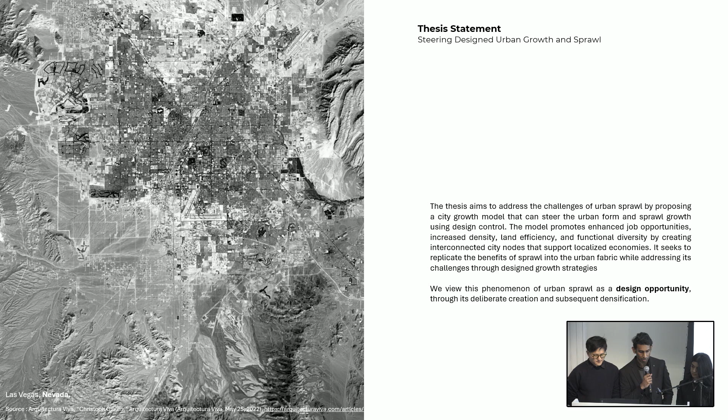Our definition of sprawl is a single function low land efficiency settlement. As newer and rapid forms of transportation became viable, people travel further away from the city center to find open residential settlements that are low density, developed at the expense of long journeys to and from work.

But sprawl presents an opportunity when it creates parcels of low land value, which lead to affordable living with quality open space outside the city at a negotiable distance from the place of work, where we are looking to exploit this opportunity to control and design the pattern of sprawl.

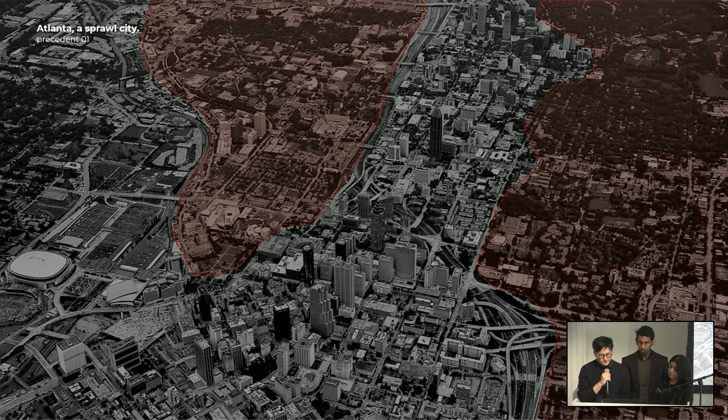We look at a few cities like Atlanta and Barcelona. In our precedents, we see areas of predominant character in concentration, mainly live, work, visit. For us, Atlanta represents a sparse density, heterogenic growth, and Barcelona represents a dense, homogeneous growth.

In Atlanta, by identifying the transport nodes in the city, we learned that the public transportation system is serving a small region which happens to be the higher density regions. Public infrastructure cannot efficiently function in areas of low density.

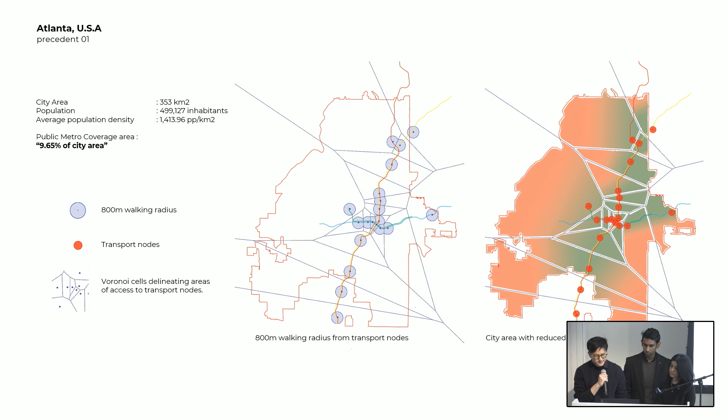Then we look at our next precedent, Barcelona. In Barcelona, we learned that the public infrastructure is easily accessible to a significant population owing to its dense population.

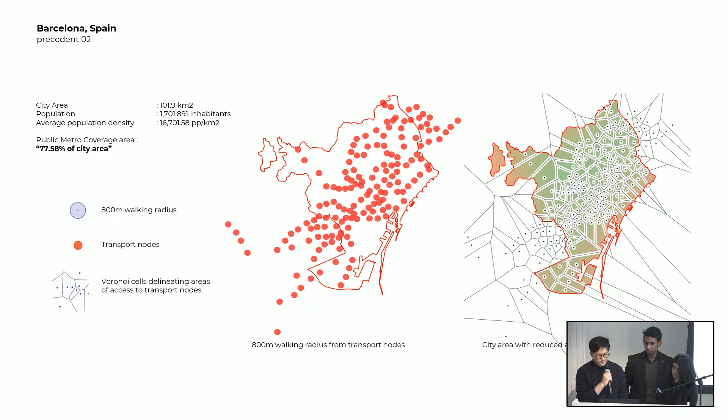While Barcelona's compact urban form successfully achieves higher density compared to Atlanta, it tends to lack differentiation in character that could define distinct city functions, such as living, working, or visiting. This leads to an isotropic urban landscape where districts appear homogeneous.

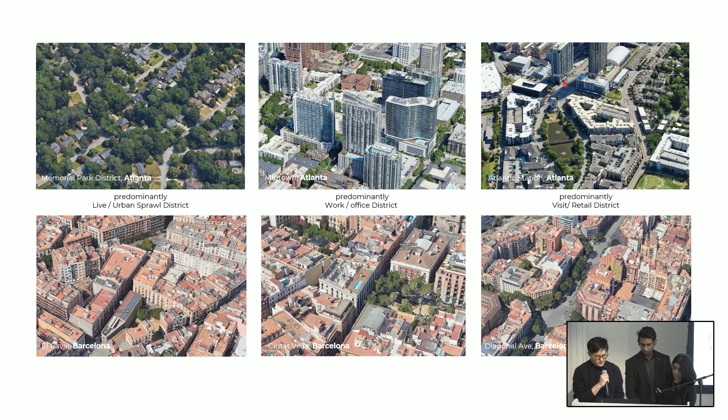The primary motivation is to develop an urban form that is both experiential and economically viable using automated urbanism and building systems. We look at literature precedents like Order Without Design on occupying and connecting to develop our urban systems, while Frei Otto's thinking by modeling has influenced our building systems.

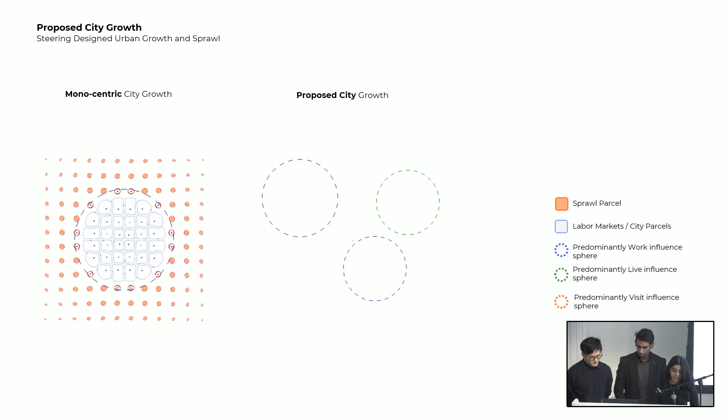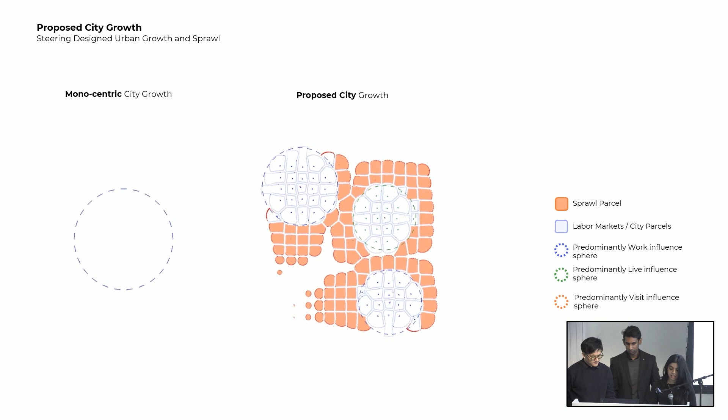Learning from Alain Bertaud's idea of looking at cities as labor markets, conventionally cities grow around labor markets, and as it grows, it transitions into urban sprawl around the city center. Our proposed growth informs the strategic location of district centers, which develop in proximity to one another.

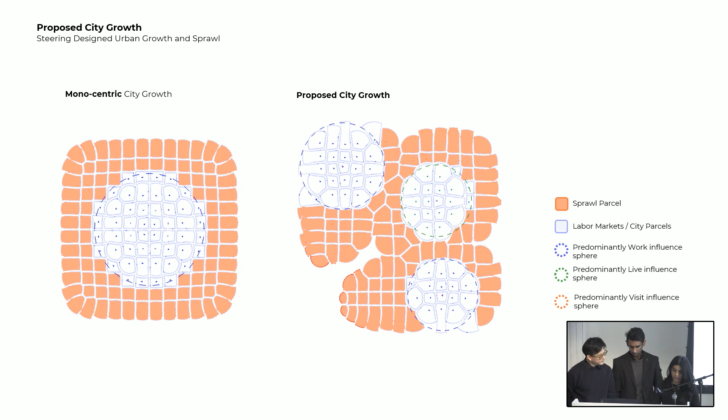We look at the sequence of expansion and compaction by varying the number of nodes and distance from city center. This generates city parcels of different sizes based on these expansions and their subsequent compactions. We evaluate these iterations based on parcel size and proximity to city center.

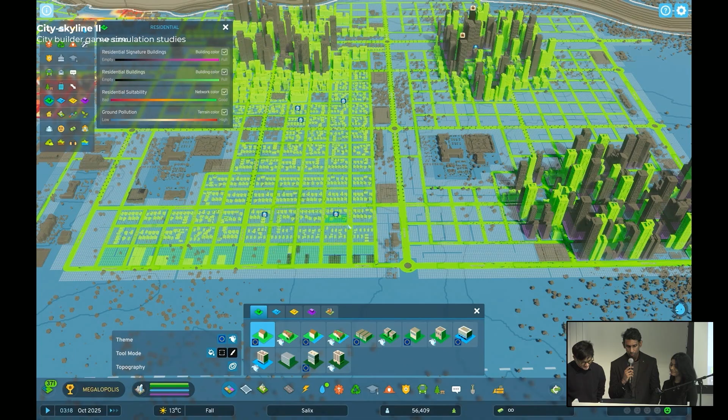Once we iterate through our sequence of growth and compaction, we use city builder games such as Cities: Skylines to simulate and evaluate our proposed city growth. This allows us to evaluate through economic constraints like land value, customer value, and workplace value.

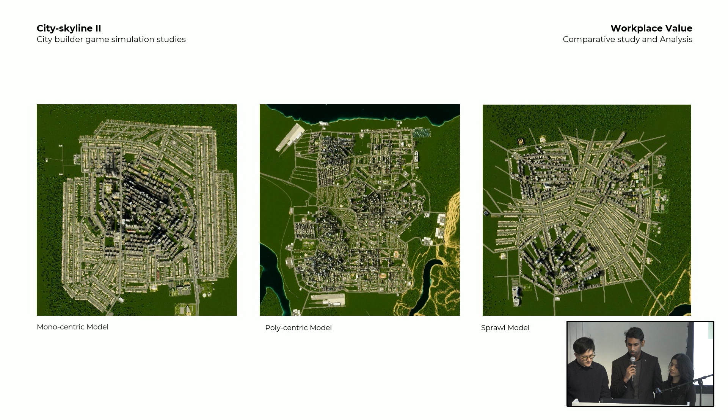We simulate our models of growth for a monocentric model and a polycentric model derived from our custom script. We evaluate this against a prototypical sprawl model. From this, we evaluate the distance to workplace, which informs potential job locations. We observe the distance between work clusters and people situated in the sprawl zone.

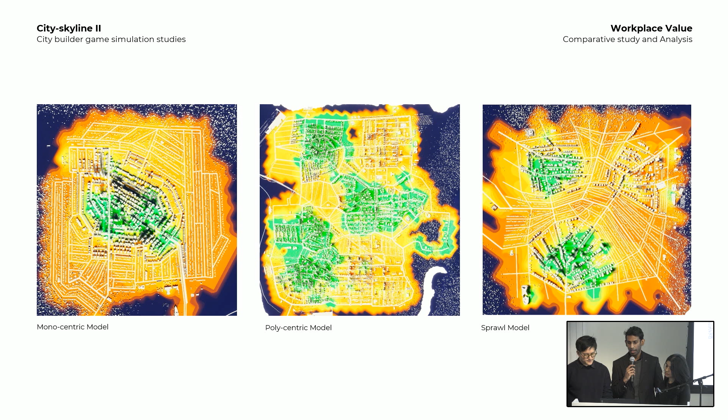The monocentric model shows an increased travel to work time as the city grows. The land value evaluation shows that monocentric models generate greater regions of low land value when compared to polycentric models of growth. City centers showed higher customer values, which implies high concentration of commercial activities. Higher concentration of commercial activities directly affects the economy of each model.

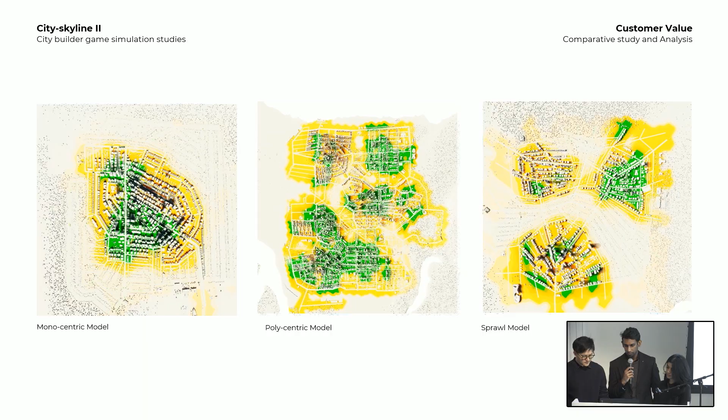Once we iterate through our sequence of growth and compaction, we learned that Cities: Skylines works on an economic model for function allocation, working on a feedback loop, where each plays against the next turn. However, it does not respond to phasing and densification once a city is created.

So our strategy is to look at these functions as districts and urban compaction as a means to achieve this controlled sprawl. We split our thesis into two parts: compaction of districts and densification of sprawl. We look to achieve this compaction through controlled densification of districts, their distribution, and the connectivity between them. This relates back to our building systems and fabrication strategies.

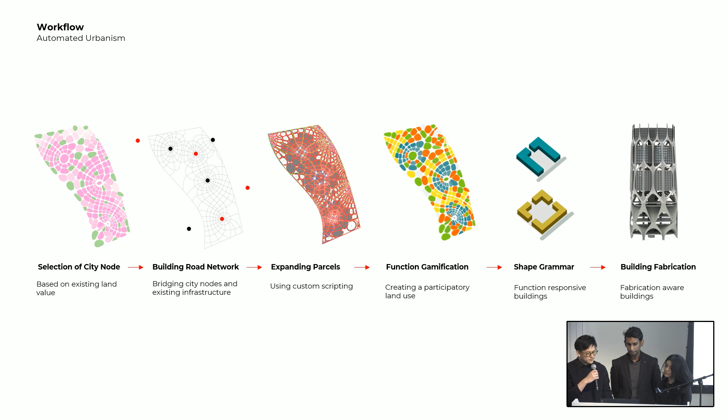And the urban architectural intelligence comes from the logic of distributions of district centers. To summarize our workflow for our automated urbanisms, we pick city nodes based on existing land value. We build the road network connecting existing infrastructure, which then guides our parcel generation and expansions.

We use participatory land use allocation to guide our city growth phasing. Each function responds to specific shape grammar rule sets. Once the urban fabric is generated, it is then translated into tectonic interpretation with our form-finding explorations.

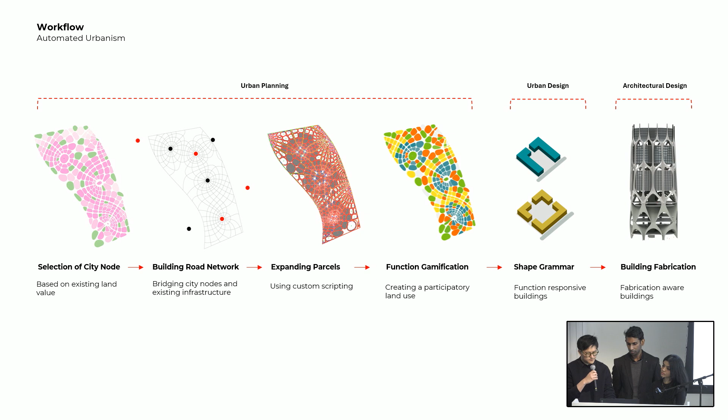To implement our theory of compaction, we choose to implement it between Walthamstow, Leytonstone, and Stratford. The existing functions in the site exhibit a combination of live and work zones. The site is contextually rich in natural features which affects the function organization. We are also looking at major access points in our area to study existing transit points as our initial input.

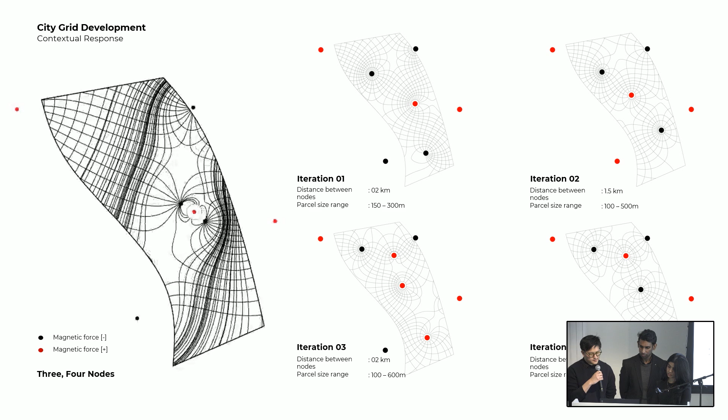So the vector fields are informed by the external site influences. This helps us to merge our internal input conditions with our contextual response. And here we tested with varying the number of city nodes input at different locations, and we evaluated them on the basis of size of parcel generated. The smaller parcels are generated in the city, and as the distance increases, bigger parcels are generated in the sprawl.

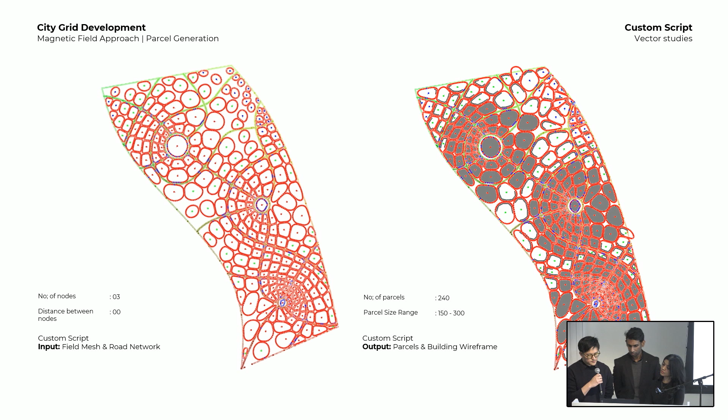The existing site context informs the generation of road network. This information overlaid with our vector field is our input condition to generate parcels and their building wireframes. With our generated parcels with vector information, we use participatory zoning and land use allocation to establish the city's growth phase and function distribution. We play the game at global level and local level.

The global play is a top-down approach that essentially dictates the phasing of the city's growth, from sprawl to densified sprawl and eventually to city by assigning city location. The local player is a participatory bottom-up approach that dictates the function distribution in the city.

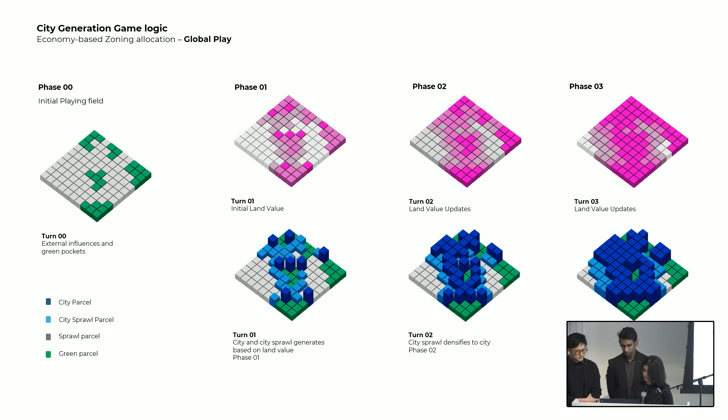In the initial field, we generate a field of sprawl which responds to the road network. This then triggers the generation of open spaces which are influenced by the site's external natural features. The contextual response informs the land value, which in turn influences the city node allocation.

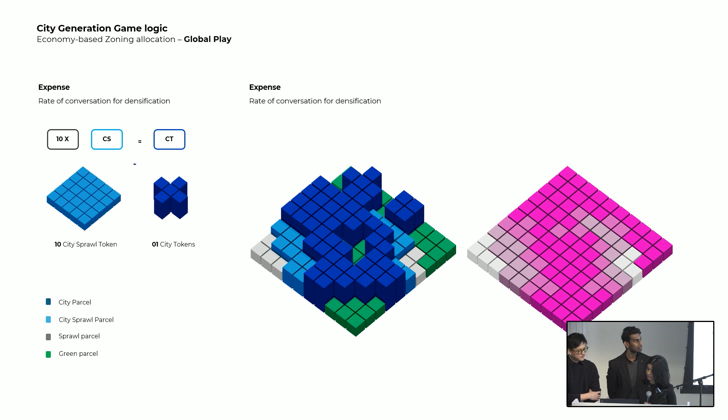The player spends city sprawl tokens to generate city which in turn triggers the next phase of city sprawl growth. This again updates the land value, which triggers the next phase of growth. So the growth logic for our city is informed by this phasing feedback loop. We look at the game as a method of generating an economic and phasing model for the city growth and densification in sprawl.

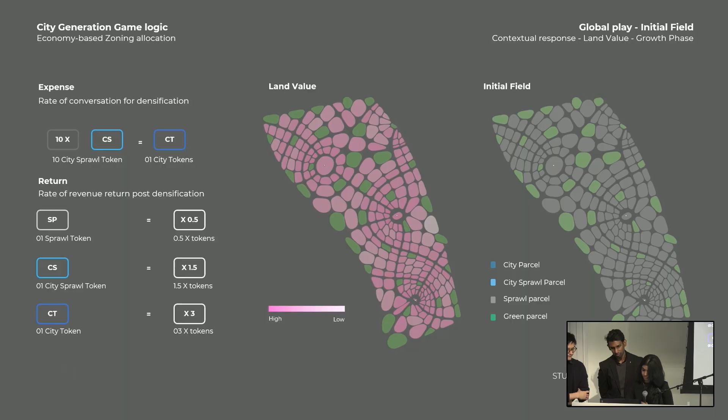The game ends when the city has achieved its mean average target revenue. We played the game to iterate through different growth strategies. We evaluated the growth sequence based on revenue spent and time taken for each growth phase. We see that the 3 nodes growing simultaneously densified with more revenue generated and comparatively less time to achieve the target revenue.

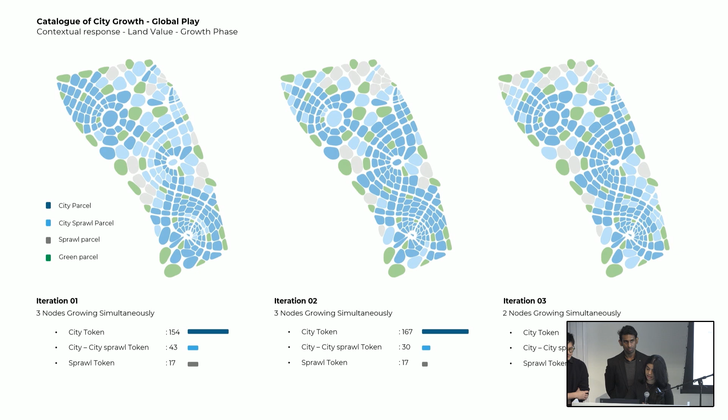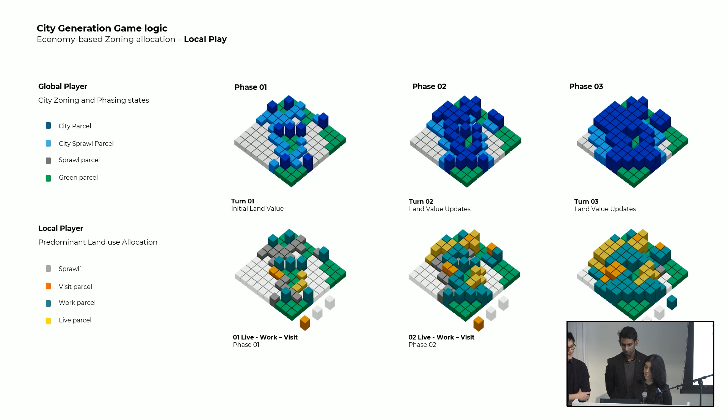From the global play, we get each growth phase, and the local player takes turn by turn to allocate functions for each parcel. The local players are live, work, and visit. The players pick the parcels based on distance to the city center, and the rate of revenue return is calculated based on the scoring matrix. The scoring matrix follows the rules for proximity for each function.

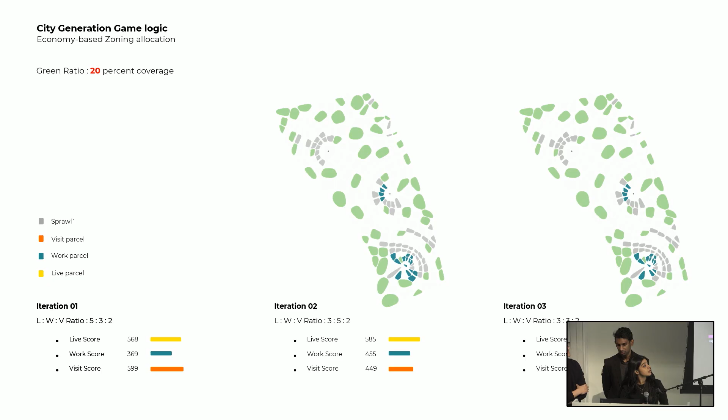It is more economically viable for the live player to build away from the city while the work player tries to build closer to the city center. This is a reflection of our notion of labor markets and labor supply and affordable living closer to the city.

Once live and work players populate the city sprawl, visit assigns itself closer to the open spaces. The visit populates itself in an 800-meter walking radius from the open space. The players play till they populate all the city sprawl. This triggers the phasing feedback loop.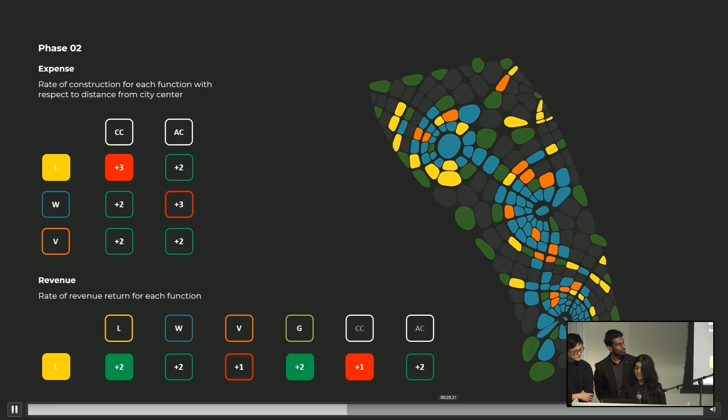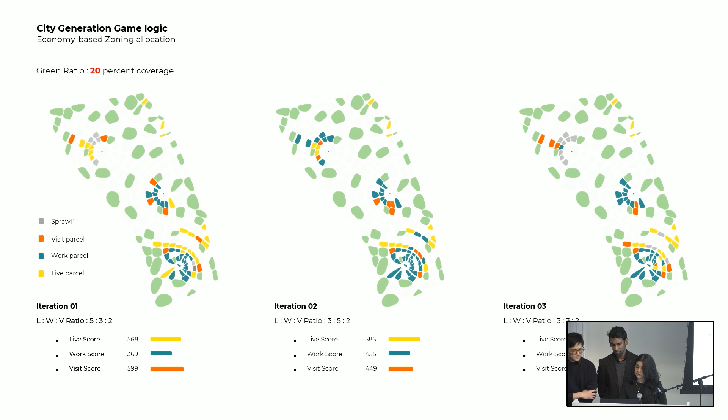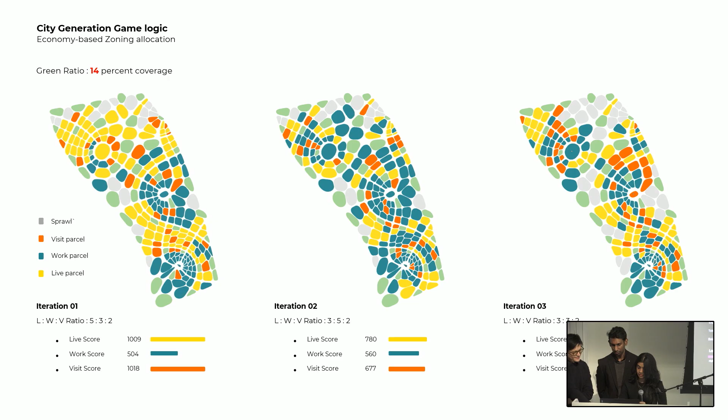We iterate through the game based on different ratios of live, work, visit to evaluate different function distribution. We evaluate them based on function scores and distribution ratio. We also tried varying the percentage of green coverage to achieve higher scores for each function. This is the summary of our game at each phase of growth and its subsequent function allocation. We see how each growth phase triggers the land value and subsequent densification of sprawl.

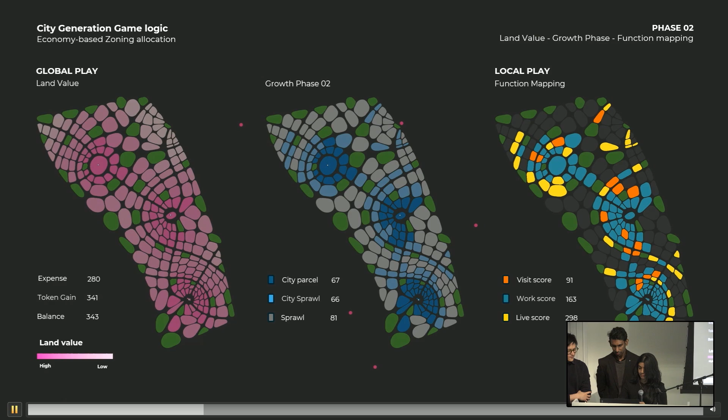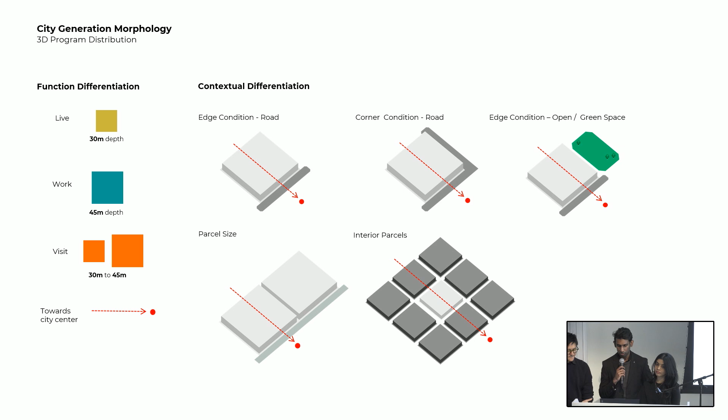We then move on to the local rules for primitive generation. The shape grammar responds to function of the building and its context by varying depth and orientation towards city center. We set the primitives for our building to respond to phase construction. Depending on the function allocation in every phase, the primitive generates podiums of said functions.

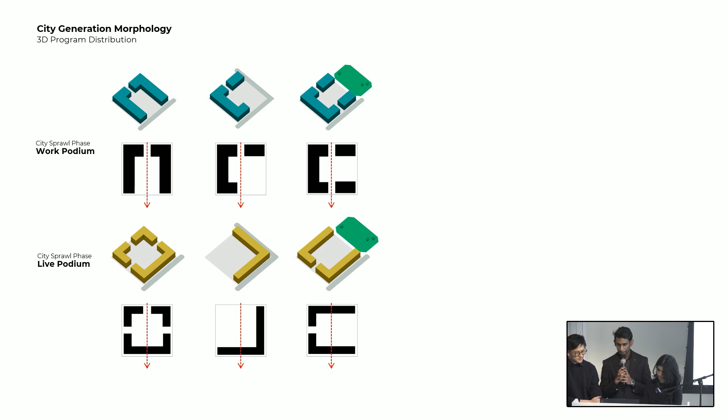These podiums respond to their immediate context based on their function differently in the next phases. Live functions cluster closer to the road to generate semi-private open spaces between them, whereas work functions move away from the road to generate public plazas. When the city sprawl densifies, the podiums add towers on top to respond to their densification. The podiums in visit behave differently based on their proximity function.

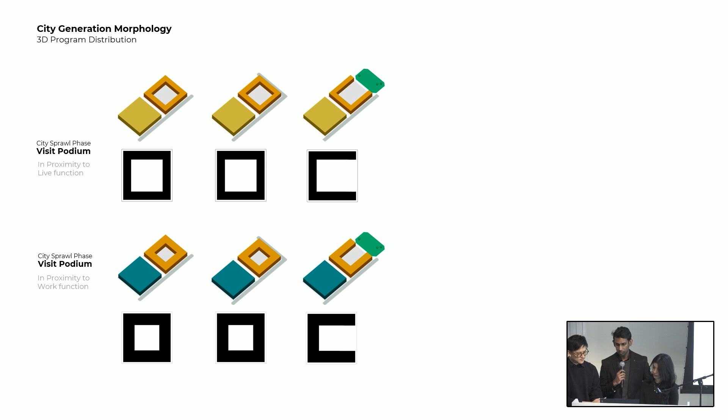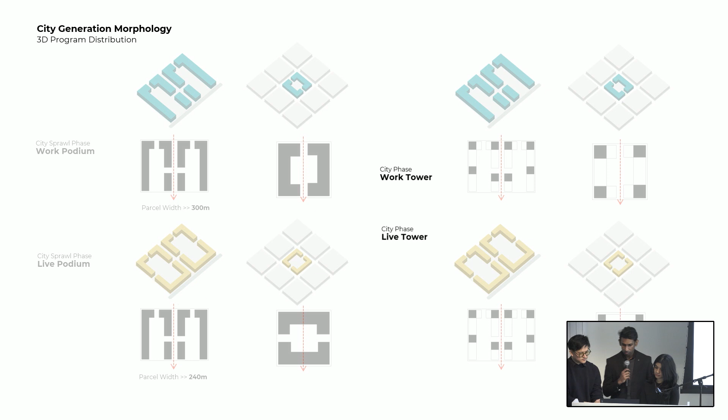If it's closer to a work function, the tower generates away from the road. If it's closer to a live function, the tower generates next to the road. When the parcel sizes grow, the massing splits, orienting in the direction of city center.

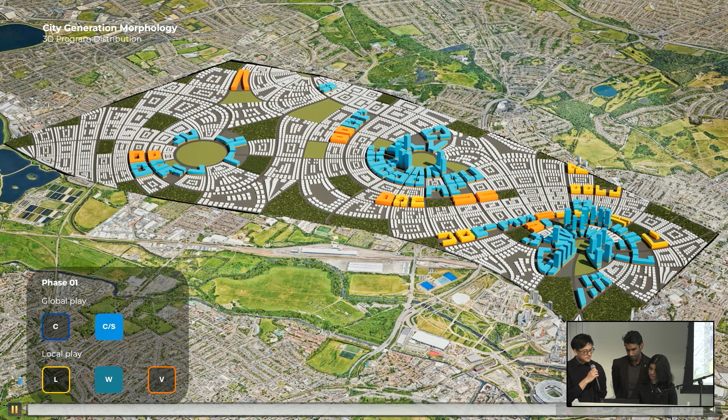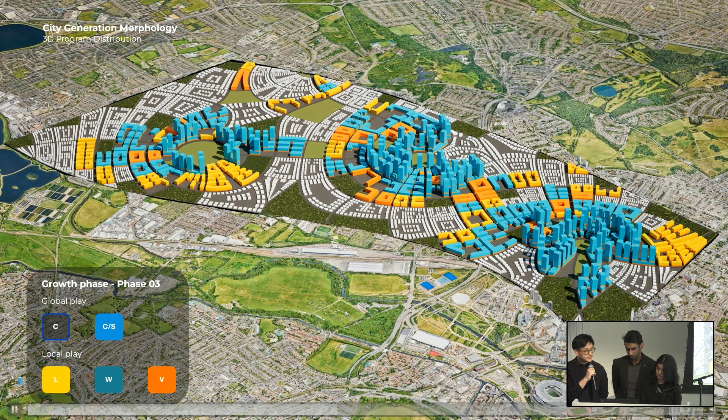Then function adds podium at every city sprawl phase, and when they densify to become city center, towers are generated. And we use the participatory allocation of city phasing and function mapping to inform the height at each phase of growth.

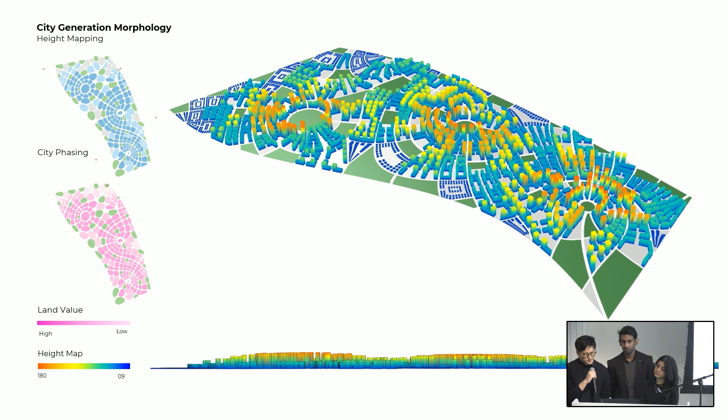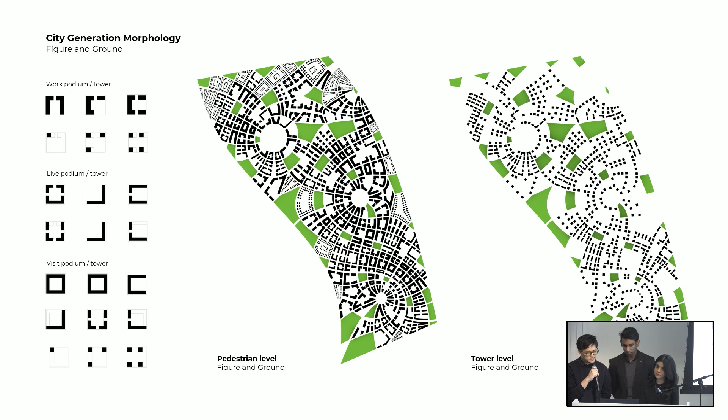The max height is determined by the relationship between parcel area to land value. This gives us the max height the parcel can grow to in that phase. And then we use figure and ground mapping to evaluate the gradient density and porosity of this urban fabric.

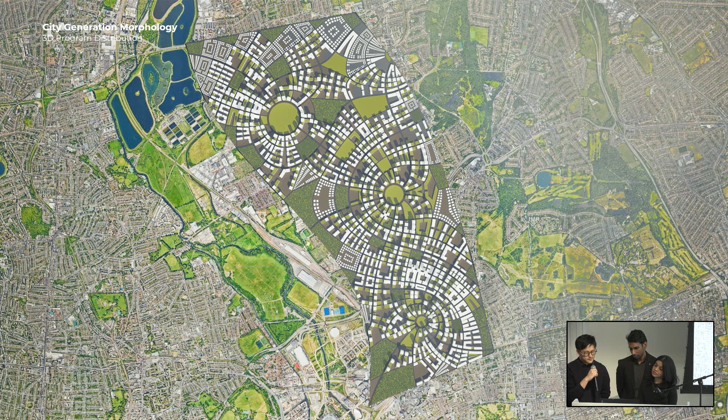And this is our urban fabric at its final state of densification and growth, showing the hierarchy of open spaces like parks, roof gardens, and plazas, and a height gradient from sprawl to city through city sprawl.

To summarize, growth logic for our city is informed by a phasing feedback loop. The contextual response triggers the initial state of growth followed by subsequent densification. Our thesis aims to densify the sprawl through improving the connectivity across the city and sprawl.

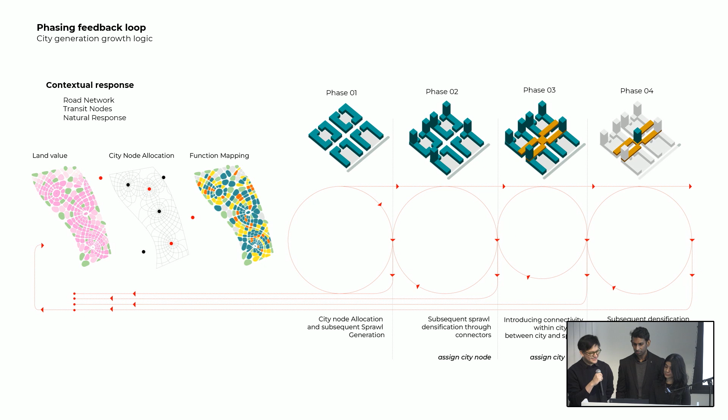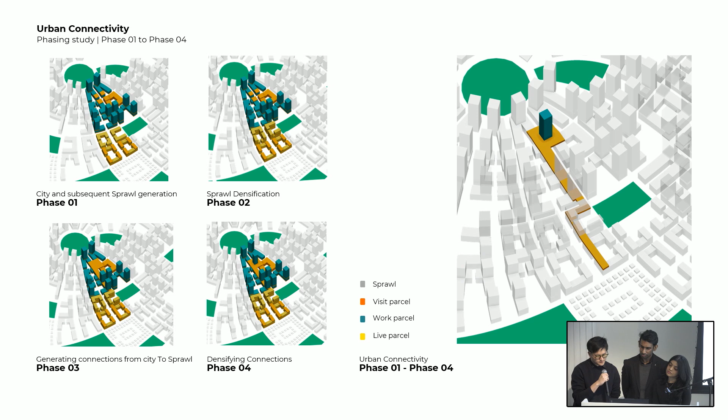And at the district level, we establish a primary connectivity at different growth phases from city to sprawl through visit functions. When three live parcels cluster together, they form a podium which connects to the city through a visit function.

So for our thesis, connectivity plays an important role because it helps us achieve this compaction through densification of districts, its distribution, and the connectivity between them. So as we discussed, connectivity plays an important role for our thesis, so we looked at different levels of connection.

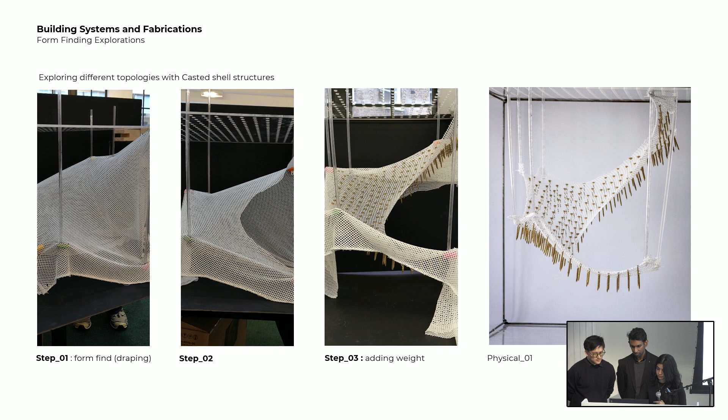As a starting point, we used form finding methods to understand compressive surfaces. This is our initial attempt at casting and inverting our form found to create a compressive shell structure. We try to digitally approximate our form found structure to understand different topologies and control parameters.

We found that rather than a point interface, a hard edge interface was more controlled. The hard edge interface can be concave and convex. This also allows us to iterate with combinations of these. We also found that intermediate touchdown points give more span control.

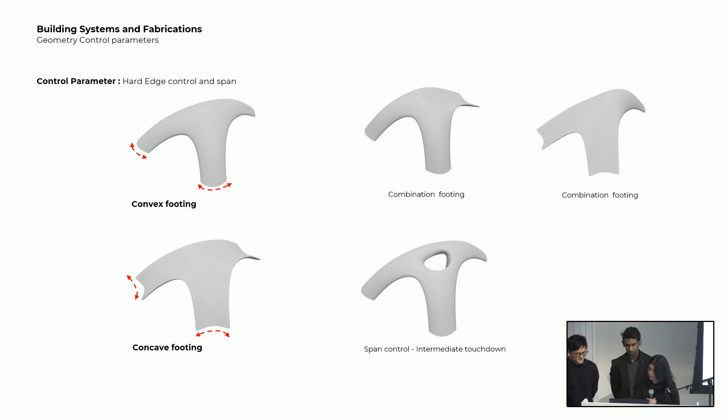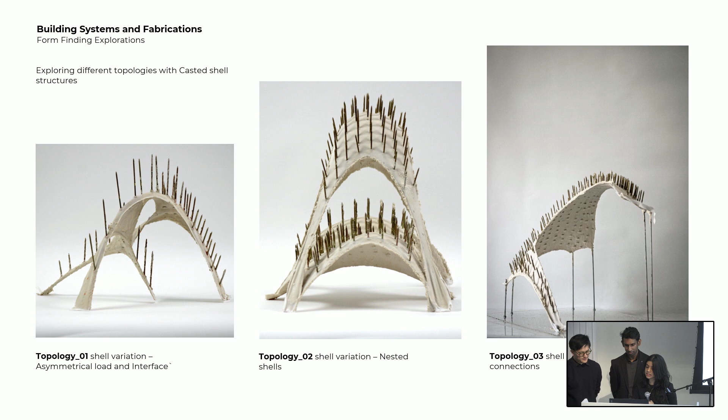We attempted to explore multi-level connectivity, same level connectivity, nested shells, and different load and asymmetrical points of interface with compression-only form.

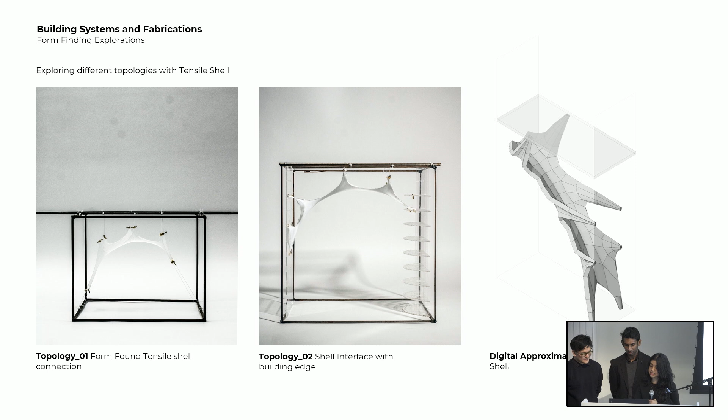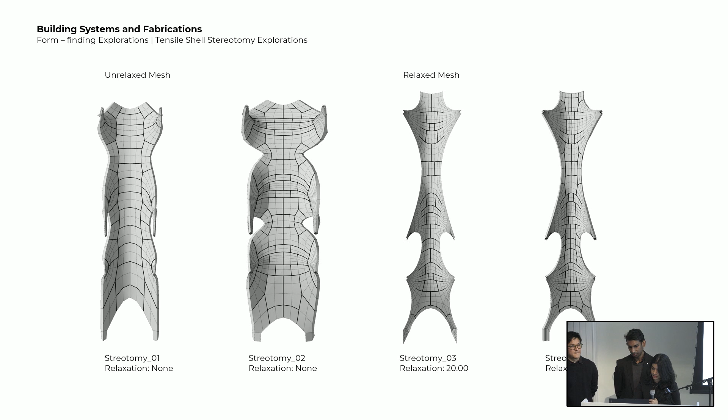We started studying multi-level connectivity with tensile shell structures. We physically modeled to find this connection between buildings. We studied how they would interface with different building edge conditions. This is our initial form found approximation and its stereotomy.

We tried to interpret connectivity as a skeleton structure. We explored varying curve network topologies by hanging chains. We tried to approximate a hanging model to stick networks, which still carries forward information about the hanging chain.

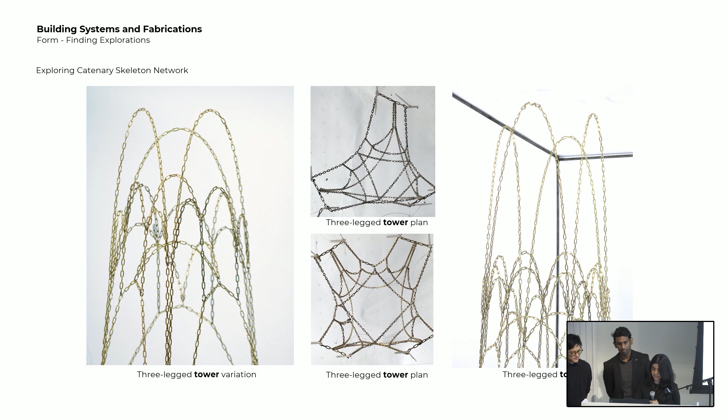We explored catenary topology networks at building level. We introduce control by exploring various levels of subdivision, points of touchdown, and adding connections between them. We studied the node geometry in our stick model and tried to translate this joinery as conic intersections. This allowed us to approximate our stick model to developable surfaces.

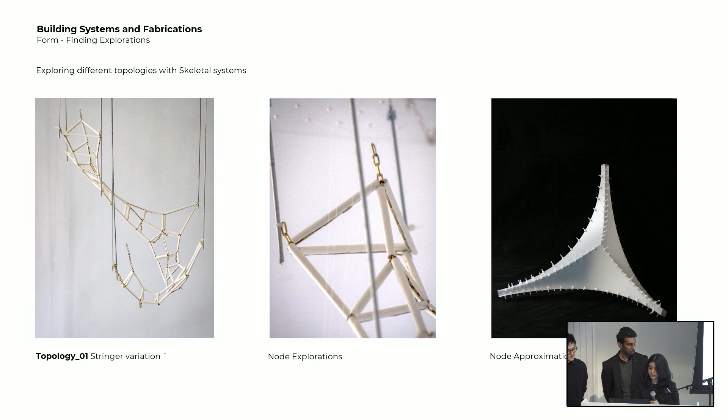We tried to digitally develop this, and with our first study, we understood that as the node angle approaches 180, it tends towards parallel, and as the node angle tends towards 0, the outer rail will kink, and at a point, the inner rail will deviate from the outer curve.

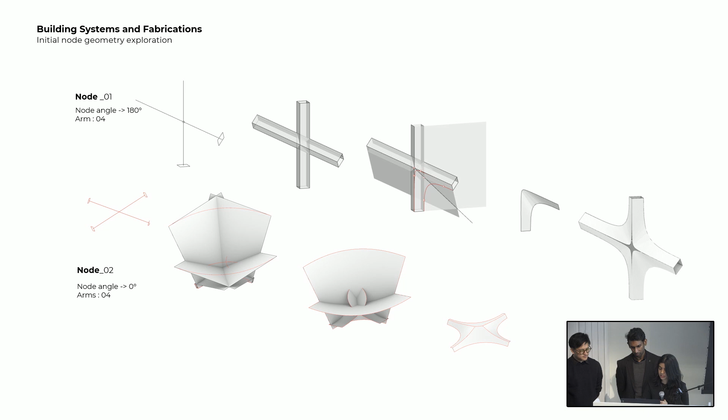This is our formwork for our concrete casting, and this is us trying to develop our formwork. We use developable surfaces to create formwork and generate offsets to manage weights. This is our cast concrete node iteration.

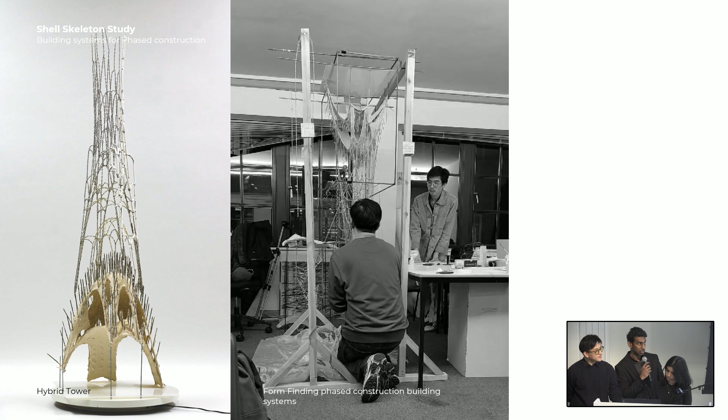Our thesis requires our fabrication to enable us to look at phased construction as well. So we started looking to merge our two systems as a phased fabrication. We explored physically how these systems could merge with one another. And this was our first iteration with this phased construction system.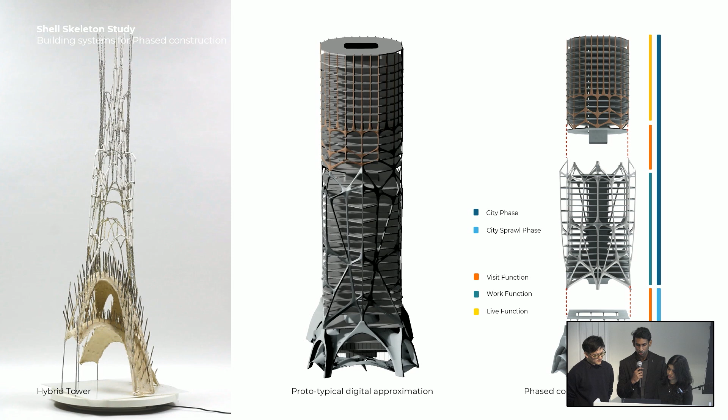Then we started to study our model digitally and generate details of the interface between surface and stick. This is our initial attempt to approximate our shell skeleton system, which responds to our automated urbanism.

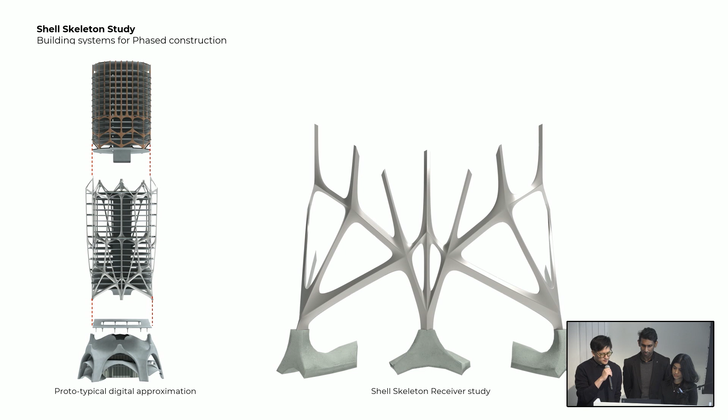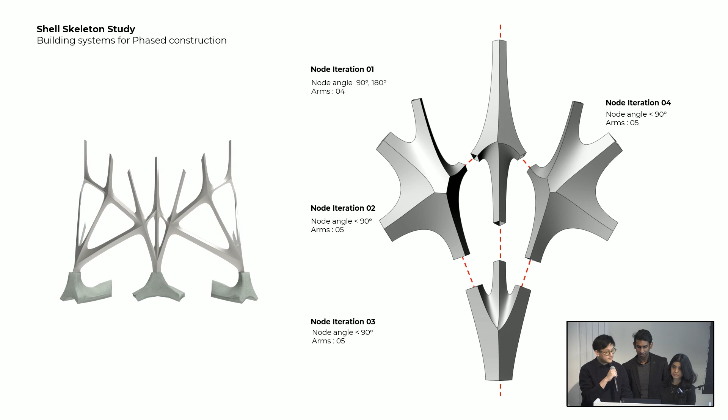So from this digital approximation, we studied the interfacing between our stick and surface fabrication techniques. This is our node fabrication study from digital approximation. We try to study them as individual developable node iterations. Then we use our building systems to translate our program mix and shape grammar to tectonic interpretation.

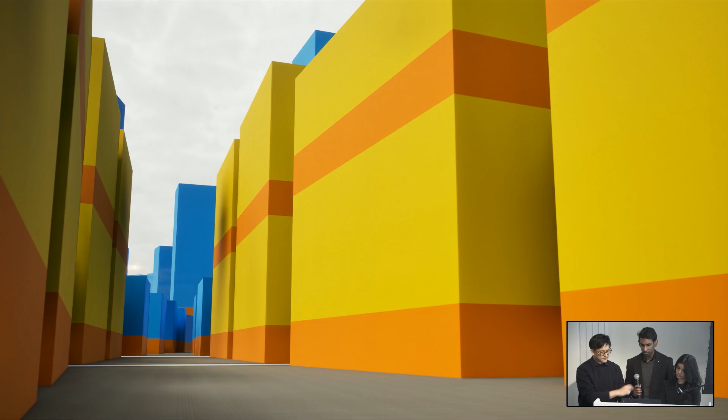So this is the podium phase. And this is the interpretation responding to our urban growth system and phased construction. Here we look at a few scenarios of how we interpret our program mix at city level with our building systems. This is one scenario. This is another scenario where we have a visit and a live above it. And this is our architectural building system interpretation.

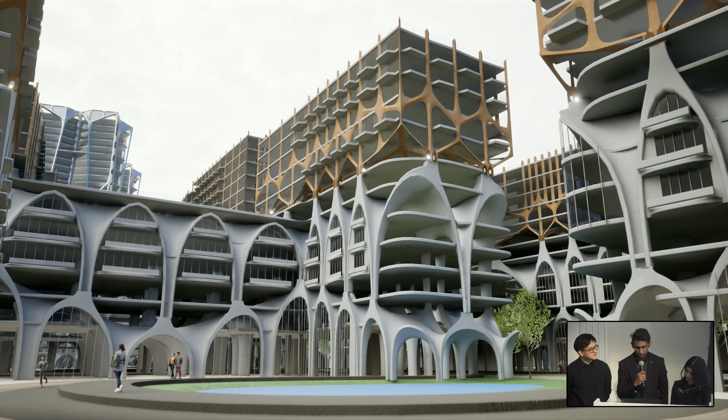In another scenario, we're looking at the same interpretation, but a different architecture system because of the contextual condition. In this condition, we're looking at a visit at the bottom and a work above this. And this is our translation through our architecture system, through the shell structure and a lightweight skeleton structure above. In another scenario, we're looking at a similar condition with a shell condition at the bottom and a lightweight skeleton structure above. We also try to look at how our interior spaces would turn out.

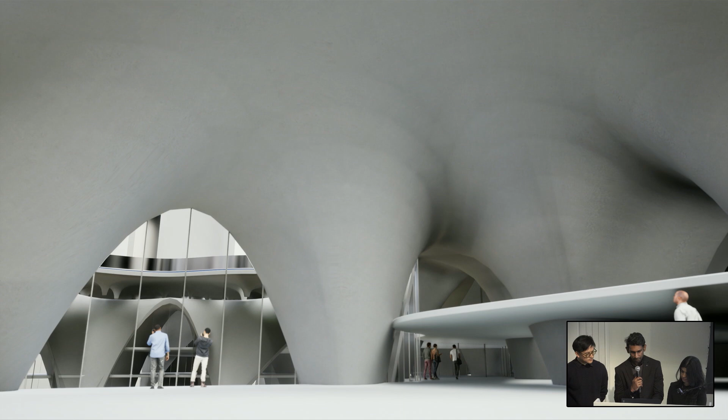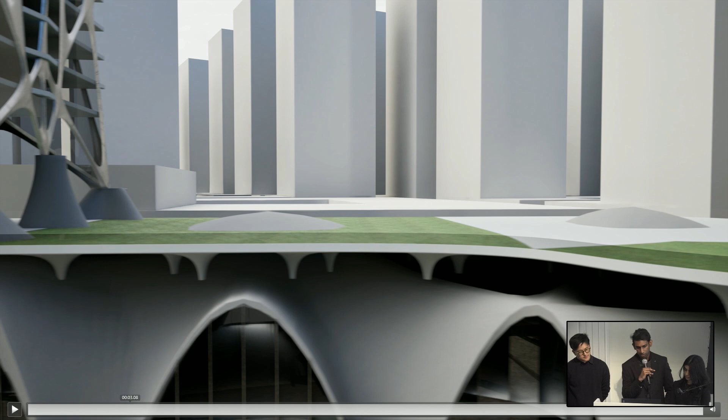And here are a few scenarios of our internal spaces. Here we look at how the overall district would look with our architecture building system. And here are a few scenarios of this. And here we have a short walkthrough through our city section. This video shows us going from the urban sprawl to the city center.

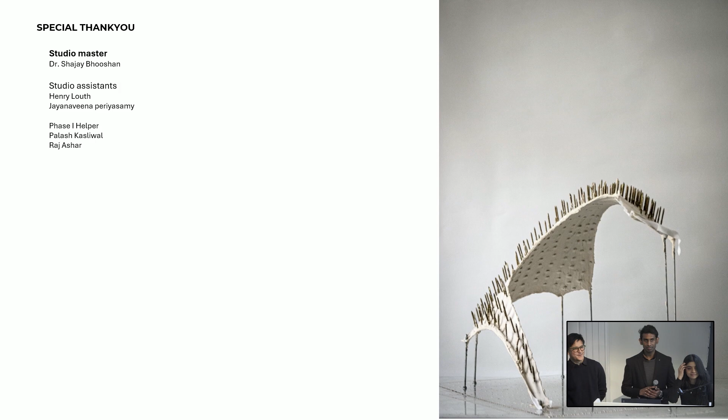We'd also like to explain our models. So initially we began with our form finding exercise where we looked at two versions of our models, a surface version and a skeleton version of the same. From here, we started looking at catenary explorations and surface interpretations where we studied multi-level connectivity of the same. In this model, we looked at how we could study a nested connection, a shell within another shell.

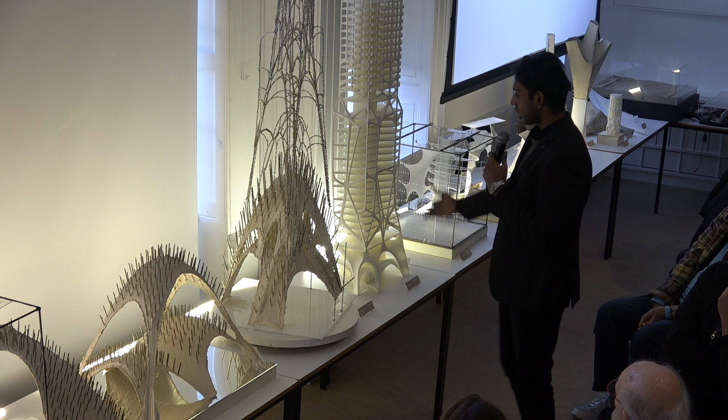On the next stage, as we mentioned before, we looked at how we have a shell at the bottom, and as part of our phased construction, we have a lightweight skeleton structure happening above this. And this was one of our architectural interpretations of how this physical model would turn out. Here, we also looked at tensile shells as bridging elements between buildings. In this model, we studied different interfaces, one from a flat surface ending into the floor slab of another building.

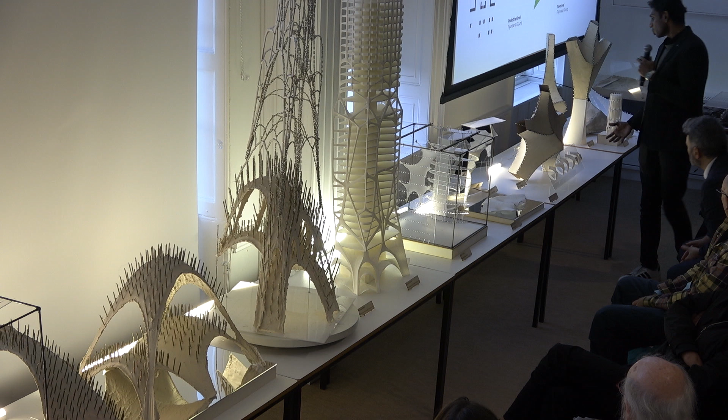Here, we looked at how stereotomy could be used as a potential fabrication method for these tensile shell structures. And these are a few examples of our conic section nodes that would possibly be used in our buildings. Yes. Thank you.

Well, I think there are lots of problems here, I have to say, especially as you cycle through and the differences between tension structures and compression structures become very evident. If you compare these two models here, you can understand how that works, or it couldn't possibly operate itself unless it's welded chains or frozen chains. The one on the right breaks all structural engineers' basic rules of compression structures, because you don't have triangular systems, you have quadrilateral systems and triangles mixed.

If you have a quadrilateral system, it's not stable, which means that parts of this aren't necessarily all tied together. You need triangles in order to give rigidity. The moment things aren't triangular, some force is going to go off in an odd direction, as it does here. And you'll find all sorts of funny things happening. Imagine the loads on this structure, whether I see it as a generic friendly illustration or whether it's meant to be a structural model. It's probably not meant to be a structural model, so I'm being a bit naughty.

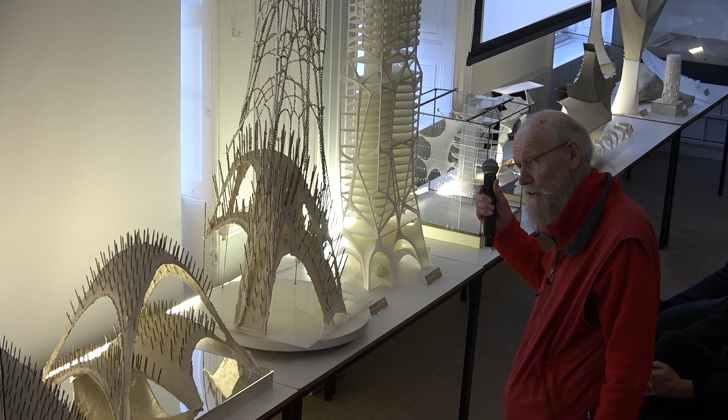But nevertheless, you have to have it based on triangles if it's a compression structure. Otherwise, the joints suddenly go like this. And there are several places in that model where they will do that. So there's a fundamental member or two missing. Whereas this works perfectly. Mother Nature decides exactly how it works. It's very elegant. It self-resolves all its internal forces. The moment you turn it upside down, things that hang naturally in this way will completely displace. That will never exist in a compression model.

So therefore you have to adapt the structure. So the genius of that, what you have to do if you're going to design thrust buildings, is to understand the basic rules there and then do the opposite in a compression structure. So there's some cautions there. I'm sure you don't have a structural engineer on hand to beat you around the head, so I'm sure you're safe. But nevertheless, it's an exploration, but it also shows a few issues which are not well understood, I think, there.

I thought the urban issues were interesting. It's a little bit formulaic, but I've treated it as the game that you described it as, a beginning, so I don't want to be too judgmental about it. And it seems to me that you've hopped from 2 dimensions to 3 dimensions well, and you've illustrated it well, but I'm trying to see a link between all the elements, the full story, if there is a full story. But nevertheless, there's an awful lot of work here.

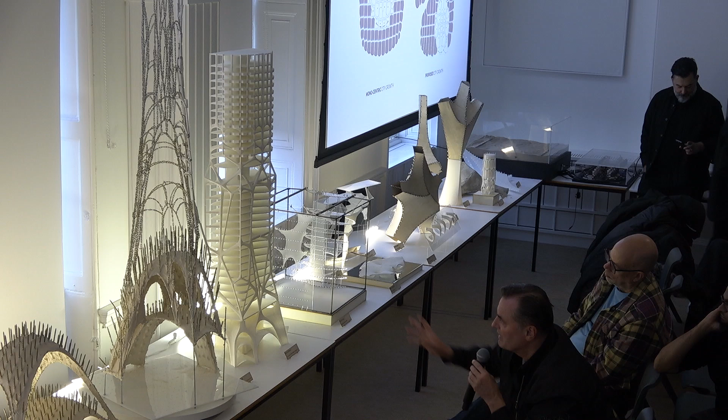The particulars I can't necessarily defend, right? But there is something where you have degrees of triangulation, and then you go into Vierendeel, and then you go into frameworks, etc. I just think it's meant to be a structural model. It's meant to have structural rationality, and I think it does have that to some extent in the overall. But I feel also that somehow this has this kind of tripartite. In the final models, you only have two parts. You don't have oftentimes the three parts.

But what I find striking is the productivity of using this kind of parametric module proliferation and variation adaptation, how you can make a city feel coherent when varied. Maybe it's on the side of monotony, there should be more variety maybe, and you have three systems, maybe there should be more. I think it starts to work. It's definitely not a kind of garbage spill or visual chaos.

It has some order, and you're aligning functions with tectonics, residential, office spaces, podium, retail spaces, etc. So I think it works. It gives me confidence. It's a nice kind of sketch, really, on the tectonic translation. On the urbanism itself, I also feel it has some merit, but the gaming, although it's quite elaborate, it's always hard for us to follow exactly how you see the process, how you see the economics playing out.

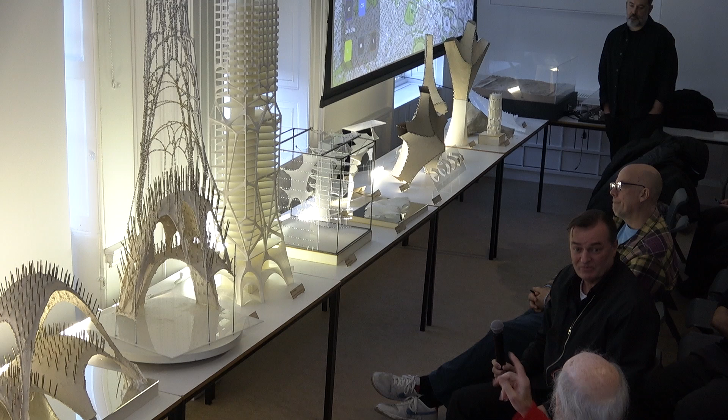That you're trying this, I very much subscribe to, but it would require a seminar to sit down together to appreciate whether there are flaws like Mike sees here. I probably see quite a few flaws in your economics. But if you think of it as a gossamer external lightweight net, then you can make it work. But you're doing half and half here. That's what I like. Schizophrenic, but exactly.

In which case, that's the whole point. I think what we're driving at is the system differentiation and phase change within a single structure, and not a uniform system. Here, all of this is rational. Yeah. Okay. Here it goes weird. And then it becomes rational at the bottom, and there's opportunity for great discussion.

Maybe I need another few years. Exciting things on the planet. I need to hone my intuitions for another few years to reach the same.

I do like your joints. The model joints is always a satisfactory exercise, if you understand loads, directions, form, and they all interact beautifully.

I also want to say congratulations. I mean, you really managed to bring it down to the eye level, which is very exciting. I think it looks really stunning. It's very ambitious. I'm not sure if you can apply it to the whole master plan.

And then to the master plan, I'm wondering, why was the decision to erase the whole area or not keep some areas? It's just like you cut out and erase the whole. Was that ambition just to not work with the context? So here we're just looking at a sprawl densification system and using the site as a prototypical area to test out our system. Right. Okay.